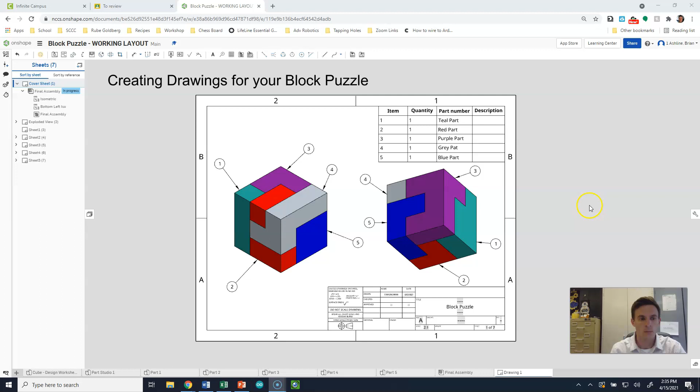Hi everybody. Today we're going to be talking about the drawings and what you're going to need to do to set them up. In your cover sheet, you're going to need your part balloons, a bill of materials, your cube from the typical isometric view, and also your cube from the bottom left isometric view. So let me show you how you're going to create that first.

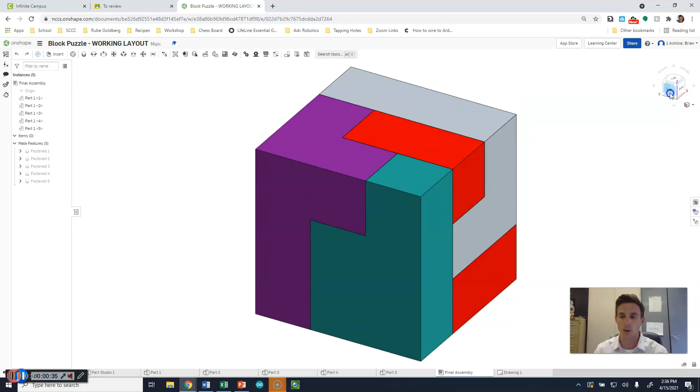You're going to run into your final assembly quickly. Again, the front, right, and top is your default isometric view. We want the exact opposite. So we're going to slide over to this corner here, where we can see the back, left, and bottom. And then we're going to click on this down here.

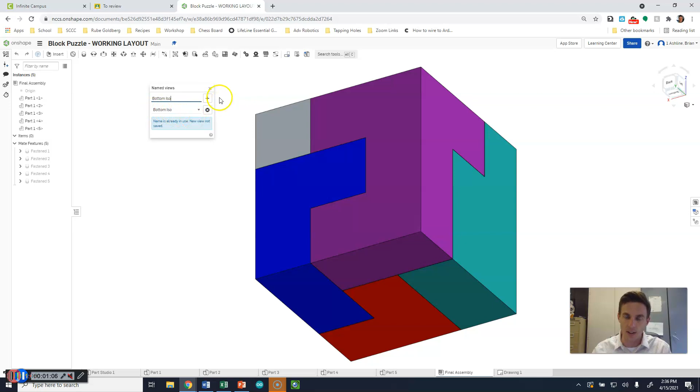We'll say named views. We can create a name for all sorts of views that we want to use later on in the drawing. So I'm going to name this bottom ISO, and I would hit the plus box, but it says I already have that, so I'm just going to leave it. But you would click the plus box, and then you would see that down here. So when we run back now to our drawings, we can delete that one for the moment.

We can place, and I'm going to select my final assembly, and then for my view orientation, I'm going to slide all the way to the bottom where it says bottom ISO. I've got some other views in there too, but I'm going to select bottom ISO, and then drop that bottom ISO onto the sheet.

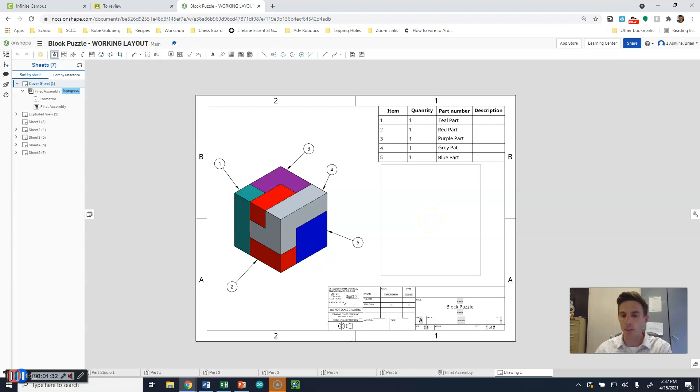All right, just like always, we're going to shade it. And we're also going to once again add our part numbers to this, so that it's super clear what each one is.

Now, as far as our bill of materials is concerned, all we really need is something under part number, the color, and then like part or piece. So my part number 1 is my teal part, and I can see that over here too. My part number 2 is my red part, I can see that there and there. Part number 3 is purple. Part number 4 is gray. And part number 5 is my blue.

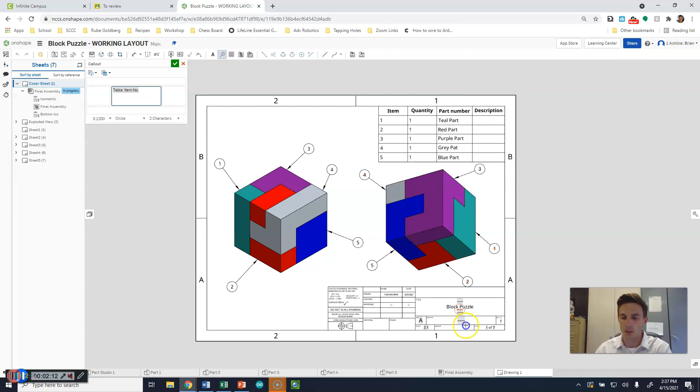Okay, we need the title, and we need to make sure that our scale is accurate. That's the cover sheet.

Okay, moving on to the next sheet. It is our exploded view sheet. So let me show you how you're going to pull this in. You've already created your exploded view in your assembly.

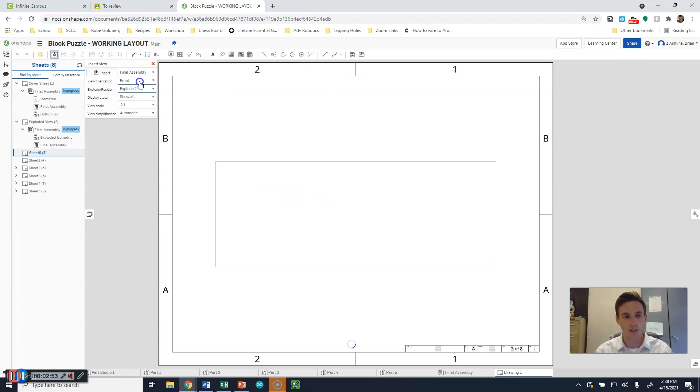Oh, actually, the other problem that I have right now is I really want to be in an isometric view. So I'm going to select my isometric view, and there's one of my exploded views. I do think it's exploded 1. So I'm going to bring that up, and I can drop that into my view.

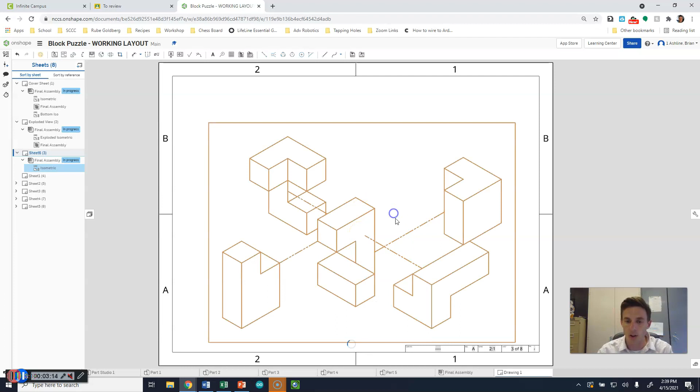And again, this is also going to be shaded, and it's also going to have part balloons and a bill of materials. All right, so I'm going to delete this and go back to this one because this is what it should really look like: part balloons, bill of materials, proper scale, layout.

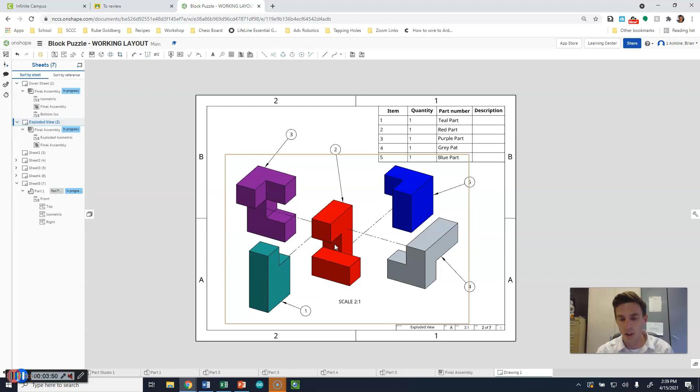There should be a white gap of some sort between all of your parts, and find the part that's like the anchor part, the thing that everything else kind of goes around, and then build off of that as you create your exploded view. And if you still have questions about the exploded view because you didn't do it, then check out my video on the exploded view that was turned in before.

Alright, so then I have my individual views, and we're actually going to talk about this to begin with here in this sheet, where we can see my colored isometric, my orthographic, my name, my proper scale, all of that's going to be associated. But I want to talk to you guys about selecting the best front view. So we're going to be working in this one here on my purple part.

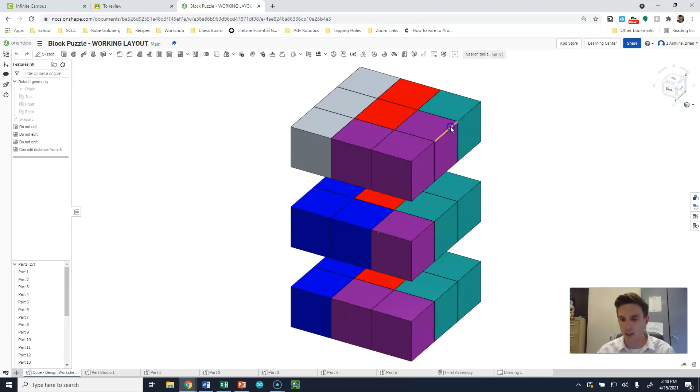Okay, now when I look at my part itself, when I drew this in this direction here, and then I bumped this little piece off of the back. That really just has to do with the fact that when I look at my purple part from this direction, that is really what it looks like.

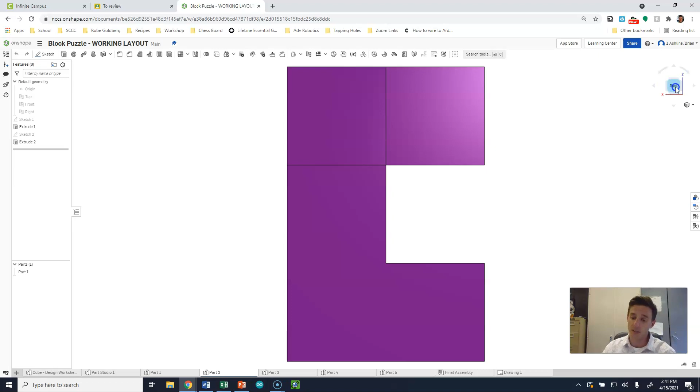I see my C, and then I see the thing push off towards the back. But the problem is that our front view on our drawings should be our most detailed view. So if I were to select my front view for my drawing, I would be missing this bump out here on the back. Technically, although my model says that this is the back view, this is still my most descriptive view because it's not going to show a hidden line later on.

And I'll show you what I mean in my drawing. So when we come into here, we are going to insert part 2.

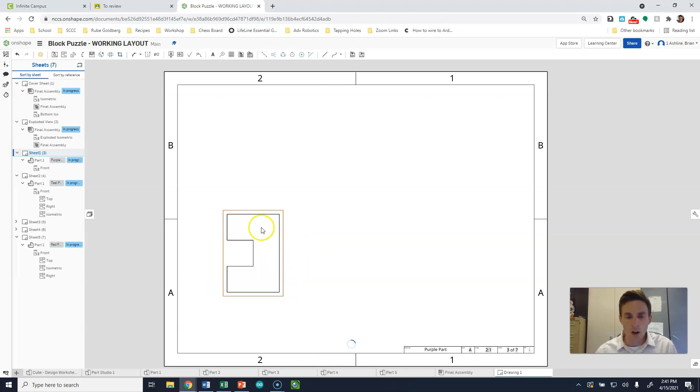So if I just did this as its default, and I drop this view in like this, and I turn on my hidden lines, we can see that something is back there from my hidden lines, but we really can't see what it is. I'm not saying that hidden lines shouldn't be in your front view, because sometimes they are, but if we can choose a view that has less hidden lines or no hidden lines at all, that's better than having a view that has more hidden lines.

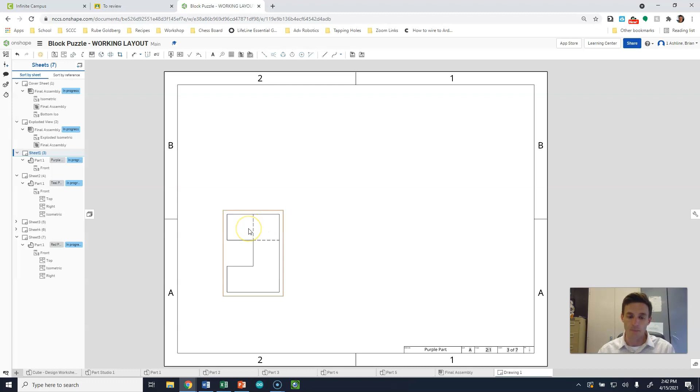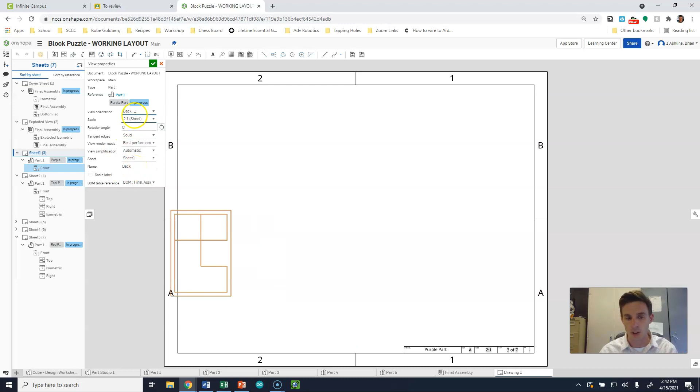So I'm going to double click on this again, and now I've realized, like I just showed you, that it's not the front of my part that I really want, but it's the back. So before I put my other views in, because it won't work after you project your views, you'd have to delete those. But while you just have your front view, we're going to change the view orientation to your most descriptive, most detailed view of your part, which again, in my case, is my back view.

Now I can project this up, I can project this over, and I can project this into my isometric view. My isometric view should not have hidden lines on, so I'm going to turn those off, and I'm going to shade it.

I have my hidden lines on for my other view, so now it's time to do the dimensioning. So when dimensioning, we really need to think about the height, the depth, and the length. Remember, in our front view, we can see the height and the length. In our side view, we can see the height and the depth as it goes from front to back. And then in the top view, we can see the length and the depth as it goes front to back.

For the most part, you probably will be able to dimension within 2 views. It really depends on your part. But as you look at my drawings as I go down below, most of my dimensions are based upon just 2 views.

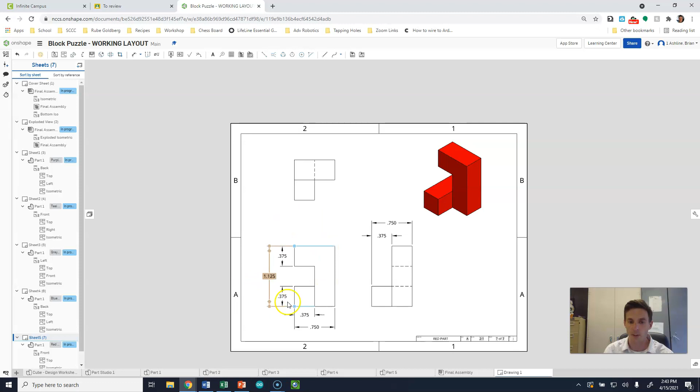So let's go back to my first sheet here and let's start to put in my dimensions. I need to know all of my height information, and I want to group my height information together if possible. So I'm going to pull my 0.375 off of here. That also helps define what the height is over here.

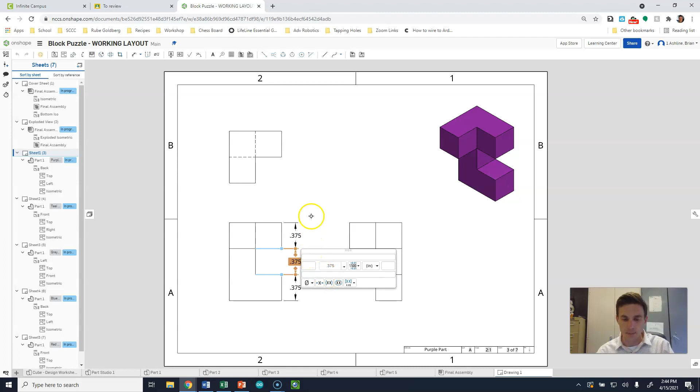I need to know what the height is of this part down here. I also need to know what the height is between here and here. So I could either dimension this here to here, and have all 3 of these things dimensioned in there and not include an overall dimension. Or I can delete that and include an overall dimension, which personally I like for objects.

It's nice to be able to see the overall size. So now we know that the top is 0.375 high, that the bottom is 0.375, and that the entire thing is 1 1/4 or 1 1/8 inches high, or 1.125. And if you did the math and subtraction, you'd know that's also 0.375 wide. Now that really accounts for all of my heights.

I don't need any more height information in the rights. All of the information involved in this drawing, height-wise, is in my front view. So that's good. I also am going to put all of my length information in my front view.

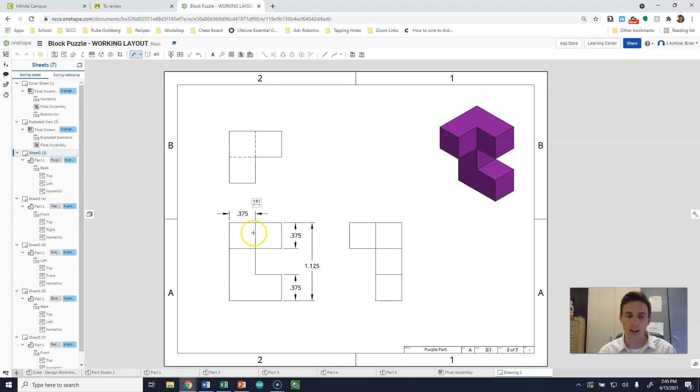The more information you can put in your front view, the better. So the distance between here and here is 3/8 of an inch, and the distance between the end and here is 0.75. We should see gaps between our extension lines and our object lines.

Okay, so now I have all of my length information listed. I have all my heights, I have all of my lengths, so the only thing that's left is my depth. I could label my depth in the top view, or I could label it in the side view. Which view do you think is best to label it?

If you said the side view, then you're correct. The reason why the top view is not so great is because there's hidden lines here, or I guess we could put it on the side. I'm going to put mine in the side view over here. You do not want to dimension to hidden lines.

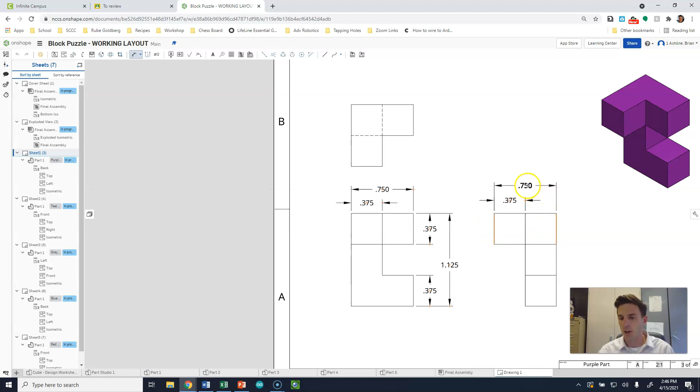Okay, so when we go to dimension this, I'm going to select from here to here, and I'm going to drop that 0.375 in there. Then I'm going to dimension between here and here. So I know now that it's 0.375 to here, and 0.75 to the entirety.

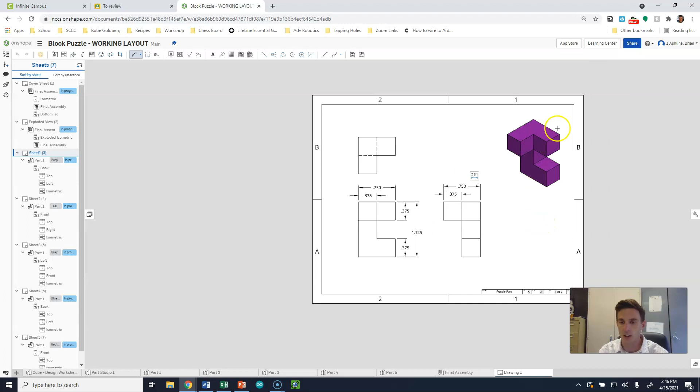And again, if I did that math, this would be 0.375. That is all the dimensions that are necessary for my purple part. So I name it, I make sure my scale is accurate, which 2:1 is what my scale is, and I have my purple isometric. I'm ready to move on to the next.

So here again, this is my most descriptive view. That's my front. I have all of my heights, I have all of my lengths, and I have my depth. Here, this is my most descriptive view. I have all of my lengths, all of my heights, all of my depths.

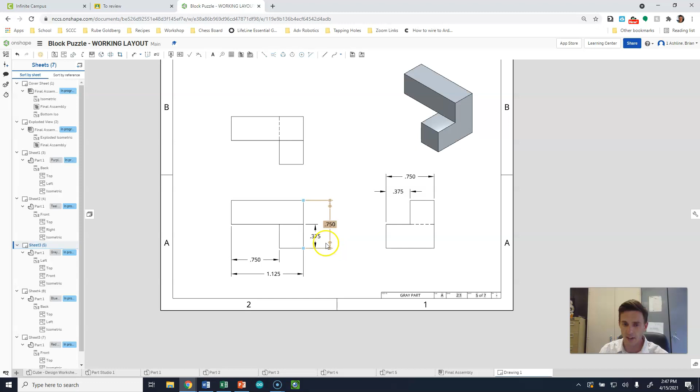This one I haven't dimensioned yet, so let's do that together. The height from here to here is 0.375. The overall height is 0.75. The distance from here to here is 0.375 in length, and the distance from here to here is 0.750 in length.

So I have, again, my lengths and my heights. All I need now is my depths, which again, I could put that in my top view, but I can't select a hidden line, so I'm going to put this in my side view.

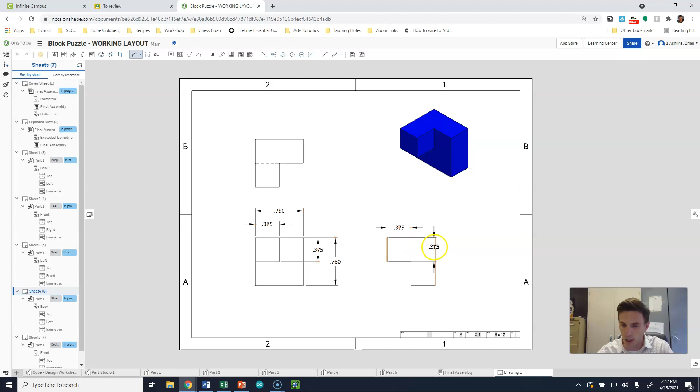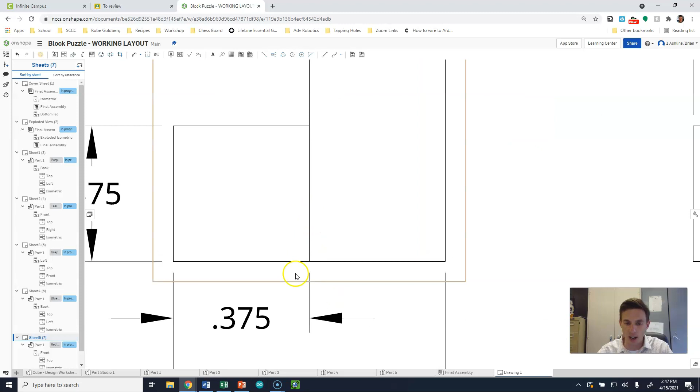The other thing you want to avoid is putting the dimensions on the side of the object. So let's take a look here, for instance. Here I've dimensioned on the bottom, while over here I've dimensioned on the top. The reason being is because there's an object line down here closer to the bottom, where if I dimensioned it at the top, then I would have this extension line running through my part, which isn't awful, but it's not ideal.

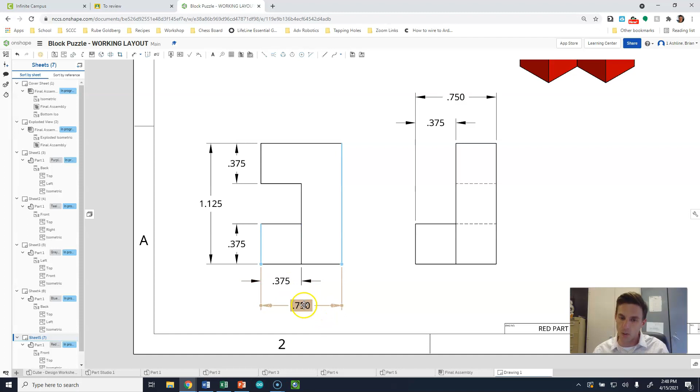So if you can avoid running extension lines through your part because the line comes to the edge, then that's great. But we do want to try and group things together whenever possible. So here I've run both of my dimensions on the bottom for my length, and for my depth dimensions I've put them on the top because, you know, that's what I did. Honestly though, in retrospect, I could dimension easily down here and down here.

One thing that is important is that duplicate dimensions does not mean that they're the same numbers. Despite the fact that these dimensions look exactly the same, one is referencing the length of the object, which is from the left side to the right side, while the other is referencing the depth of the object, which is from the front to the back. So they're the same numbers, even basically the same layout, but they reference two completely different dimensions.

So that's why they're not a duplicate dimension. Where if I had a dimension up here and here, this is that exact dimension, this is that exact dimension, because this is measuring the distance at the top, and this is measuring the distance, but they're both the depth, from front to back. So those are duplicate dimensions. I only need one set of them. I don't really want some of it up here and some of it down there. Group your dimensions together.